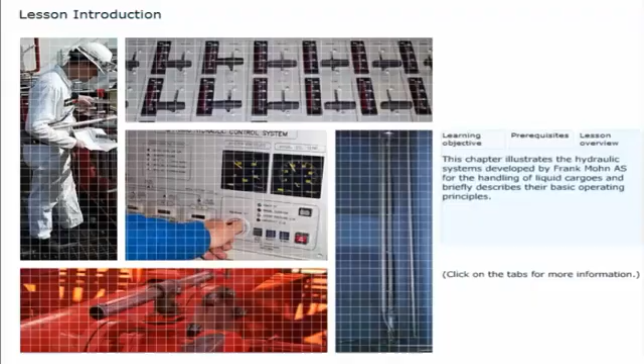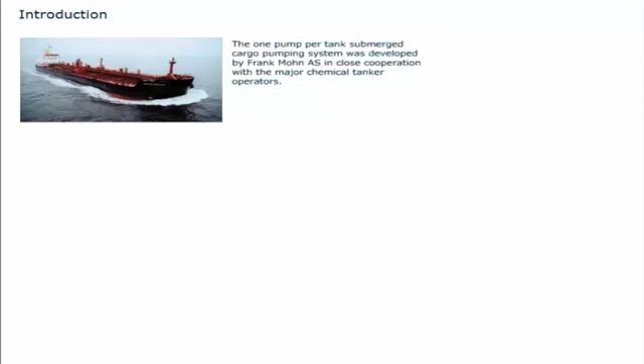The one pump per tank submerged cargo pumping system was developed by Frank Mohn AS in close cooperation with the major chemical tanker operators. The Framo system satisfies requirements for safe and profitable cargo handling, efficient stripping and tank cleaning.

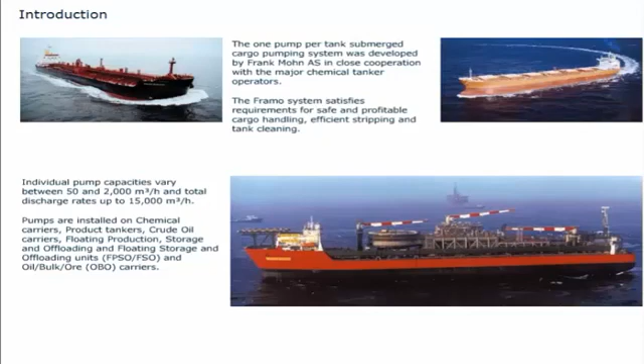Individual pump capacities vary between 50 and 2,000 cubic meters per hour, and total discharge rates up to 15,000 cubic meters per hour. Pumps are installed on chemical carriers, product tankers, crude oil carriers, floating production, storage and offloading, and floating storage and offloading units, FPSOs and FSOs.

And oil/bulk/ore OBO carriers. By January 2007, 48,655 cargo pumps had been delivered to or ordered for a total of 3,033 vessels.

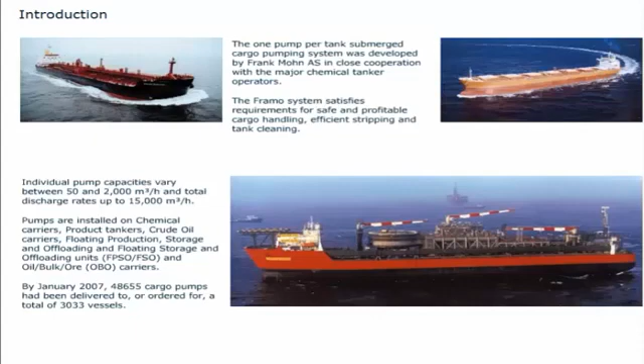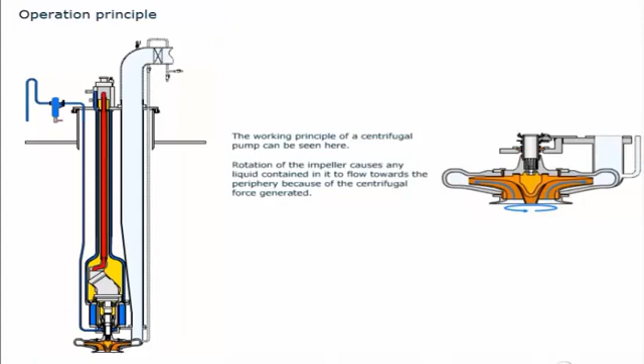The working principle of a centrifugal pump can be seen here. Rotation of the impeller causes any liquid contained in it to flow towards the periphery because of the centrifugal force generated. The center or eye of the impeller is thus evacuated, and liquid from the suction line then flows in to fill the void.

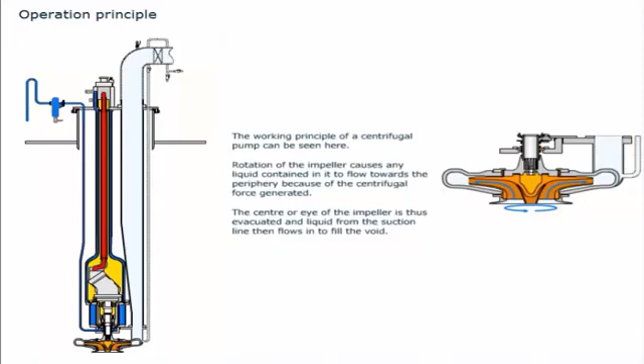The cargo pump is supported by a deck trunk welded to the deck. All the connections are on the top cover plate, to which a capacity control valve is also mounted for remote and local operation of the cargo pump.

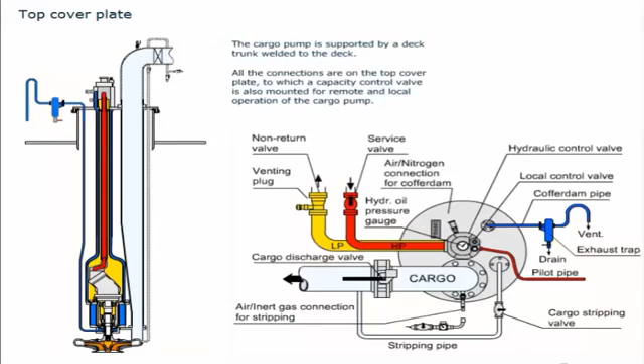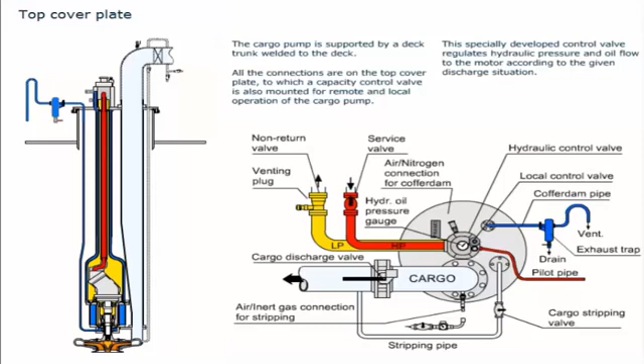This specially developed control valve regulates hydraulic pressure and oil flow to the motor according to the given discharge situation. The pressure gauge indicates the oil pressure to the motor. The pipe stack connects the pump unit to the top cover plate.

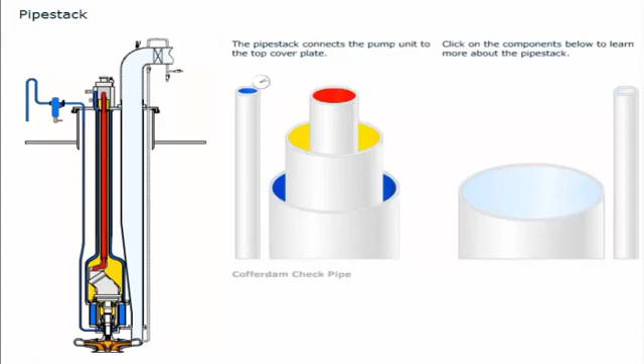Click on the components below to learn more about the pipe stack. The return from the cofferdam pipe. If any leakages, this will be discovered in the exhaust trap on the top cover plate during purging.

This is the supply line for the cargo pump. It carries the oil from the power packs to drive the hydraulic motor. This is the return line for the cargo pump. It carries the oil back after it has been used to run the motor.

Nitrogen or air is introduced during purging in order to ensure that the cofferdam is open and does not contain any cargo or oil.

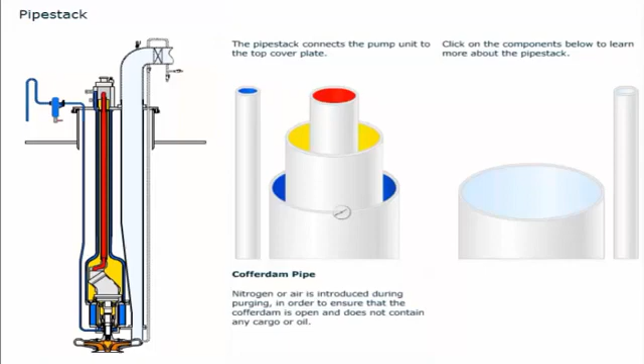Cargo is forced through this line when the motor and impeller are running. When emptying a tank, nitrogen or air is introduced through the cargo discharge pipe, and any final remaining product is forced up this line and on through the cargo manifold.

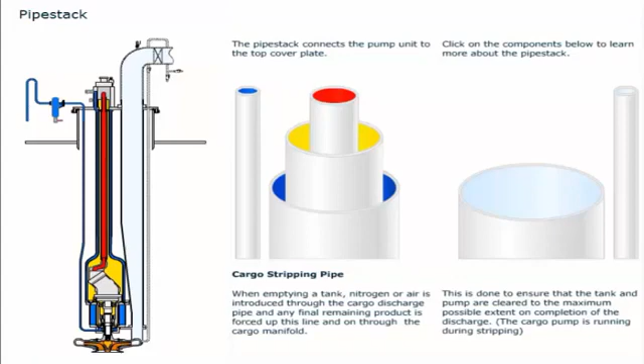This is done to ensure that the tank and pump are cleared to the maximum possible extent on completion of the discharge. The cargo pump is running during stripping.

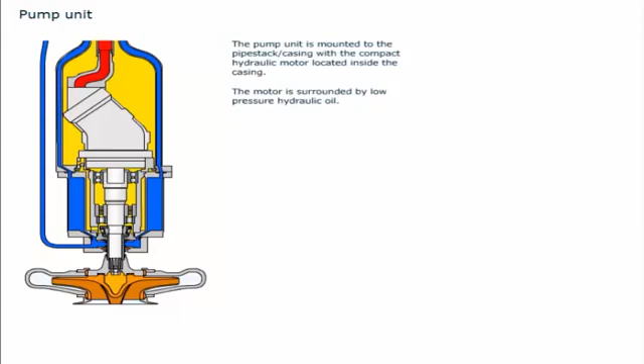The pump unit is mounted to the pipe stack/casing with a compact hydraulic motor located inside the casing. The motor is surrounded by low-pressure hydraulic oil. A short independent shaft, supported by bearings lubricated by hydraulic oil, is connected to a single-stage end-suction centrifugal pump.

The hydraulic section is surrounded by a cofferdam that completely segregates the hydraulic oil from the cargo, with a manual seal condition monitoring system. This seal arrangement consists of a mechanical oil seal, single cofferdam lip seal, and a double cargo lip seal. The cargo seal is exposed only to static head from the cargo.

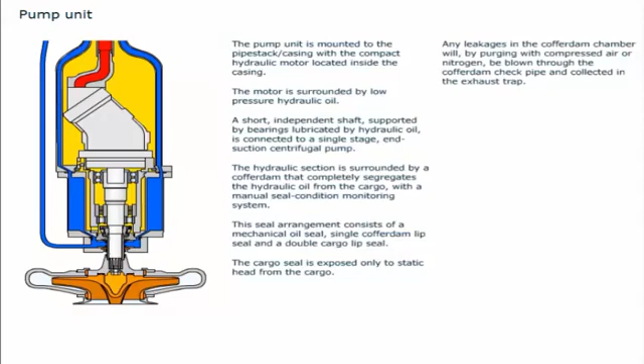Any leakages in the cofferdam chamber will, by purging with compressed air or nitrogen, be blown through the cofferdam check pipe and collected in the exhaust trap.

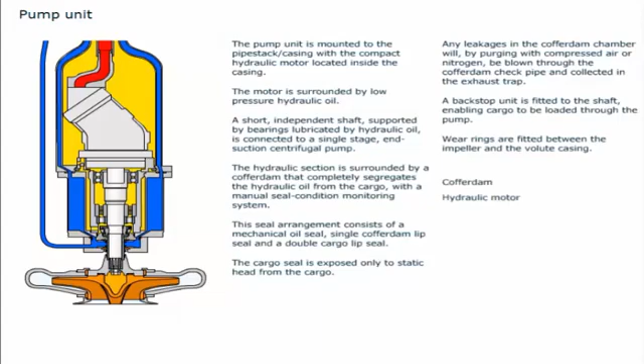A backstop unit is fitted to the shaft, enabling cargo to be loaded through the pump. Wear rings are fitted between the impeller and the volute casing. Click on the buttons to learn more about the pump unit.

The hydraulic system is built as a central hydraulic main ring line system in either a closed or open loop. Hydraulic pumps deliver oil to the main pressure line. From this main pressure line, a number of hydraulic motors can be run, provided that a sufficient number of power packs have been started.

In order not to overspeed the hydraulic motors, a speed control valve is installed upstream of each motor. It is important to understand that the power packs deliver the oil and the cargo pumps are consumers.

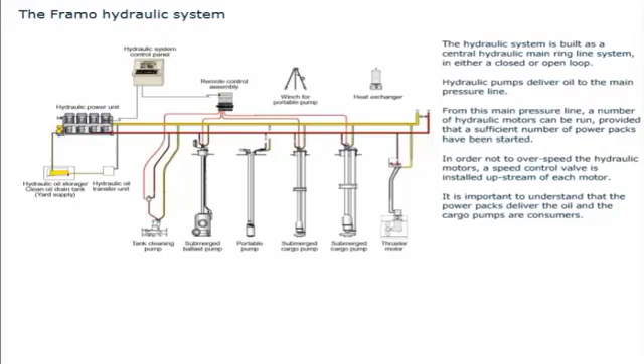In an open-loop system, the hydraulic oil is gravitated from a hydraulic oil tank to the power packs and further on via high-pressure lines to the cargo pumps and other consumers in the system. After use, the oil is transported via the return lines back into the hydraulic tank.

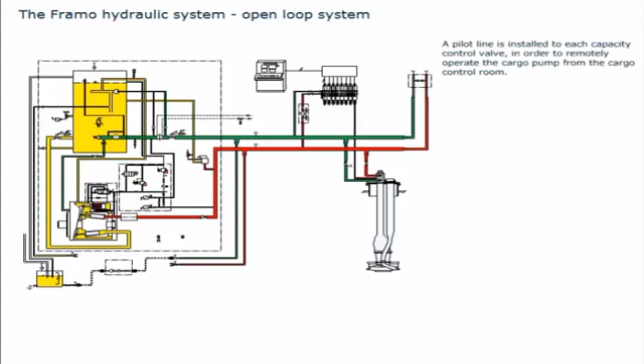A pilot line is installed to each capacity control valve in order to remotely operate the cargo pump from the cargo control room. An oil cooler is installed in the system in order to keep the oil temperature within desired limits. A jockey pump is installed inside the hydraulic oil tank in order to maintain positive pressure in the hydraulic system and to avoid contamination of the oil with cargo if a leakage should occur in the cargo pump.

The jockey pump also serves as a cooling/lubrication pump for the main hydraulic pumps. This system requires a rather large hydraulic oil tank, since all oil used is returned to this tank before being pumped back again to the consumers.

Due to this, the open-loop arrangement is commonly used in small systems, while the closed-loop arrangement is preferred for large systems.

Advantages include simple air release procedure, less piping, leading to cost reduction and lower risk of leakage, and a reduced number of components.

The disadvantage of this system is the size of the hydraulic tank.

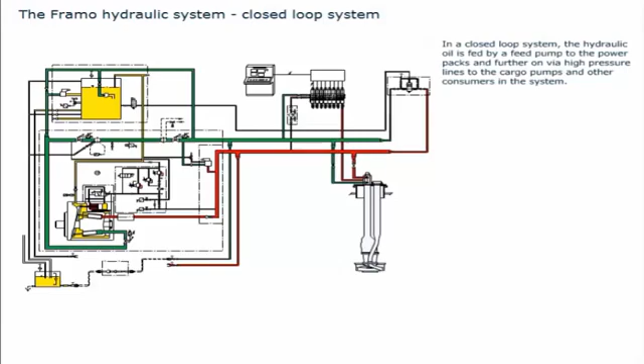In a closed-loop system, the hydraulic oil is fed by a feed pump to the power packs and further on via high-pressure lines to the cargo pumps and other consumers in the system. After use, the oil is transported via the return line.

In a closed system, only 10% of the oil goes back to the hydraulic tank, while the rest is used directly on the power packs and back to the consumers.

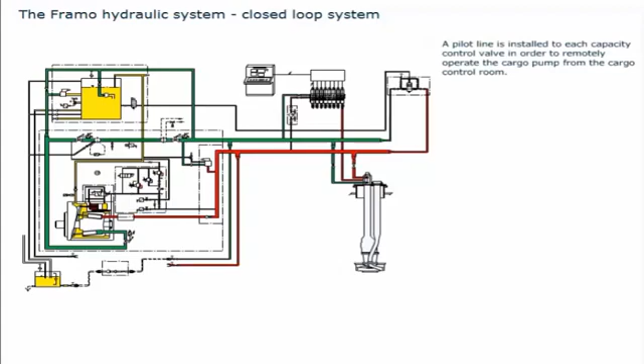A pilot line is installed to each capacity control valve in order to remotely operate the cargo pump from the cargo control room. An oil cooler is installed in the system in order to keep the oil temperature within desired limits. 3 feed pumps are installed on the hydraulic tank, 1 running constantly, 1 in standby mode, and 1 in reserve.

When the cargo system is not in use, the selected feed pump is delivering low pressure, sufficient to maintain positive pressure in the hydraulic system and to avoid contamination of the oil with cargo if a leakage should occur in the cargo pump. When the system is in use, the second feed pump starts automatically, increasing the pressure such that, in addition to leak prevention, 10% of the total oil capacity is returned to the hydraulic tank.

In addition to leak prevention, 10% of the total oil capacity is returned to the hydraulic tank. The third pump is brought online in the event of a problem with one of the regular pumps.

Since only 10% of the oil used is returned to the hydraulic tank, this system requires a much smaller hydraulic oil tank than the open system. The closed-loop system is commonly used in big systems.

The advantage of this system is the size of the hydraulic tank. Disadvantages include a more complex air release procedure, more piping, and more components.

Note: in the older systems, 2 feed pumps were installed. 1 was running in standby and 2 during normal operation.

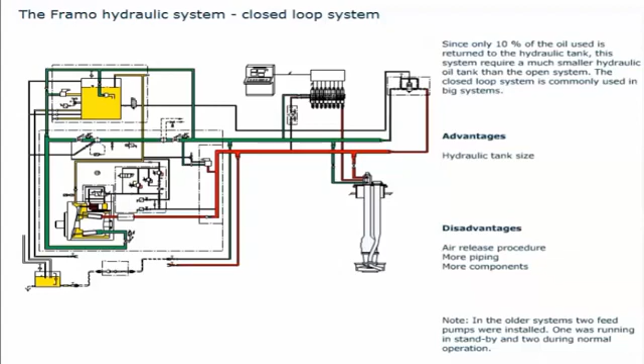Hydraulic pumps, motors and controls are devices requiring close tolerances, controlled wear surfaces, accurate finish and an adequate supply of clean hydraulic fluid. Contaminated oil will not provide proper lubrication and is a leading contributor to reduced efficiency, excessive downtime and increased maintenance cost.

The maximum recommended water content is 300 parts per million, or 0.03%, and must under no circumstances be above 500 parts per million, or 0.05%.

If in doubt, please contact Framo.

Recommended cleanliness level is code 16/12, according to ISO 4406, or CETOP PR20. 16/12 means that the number of particles above 5 micron in 1 milliliter is between 320 and 640, and the number of particles above 15 micron in 1 milliliter is between 20 and 40.

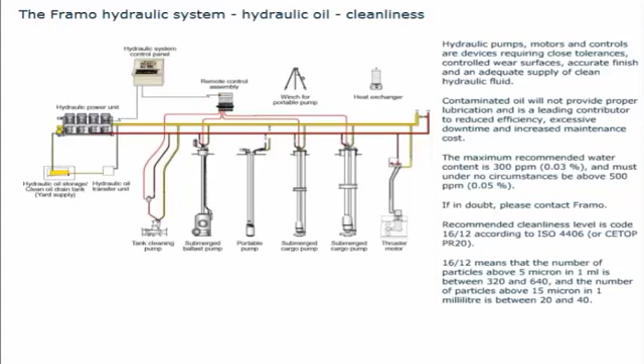The recommended operating temperature of the hydraulic oil is between 30 and 55 degrees Celsius.

If the oil temperature is below 20 degrees Celsius, circulate the oil through the heating and venting valve installed in the system for heating with only 1 power pack running until the desired oil temperature is reached. Note: do not exceed 100 bar circulating pressure during heating.

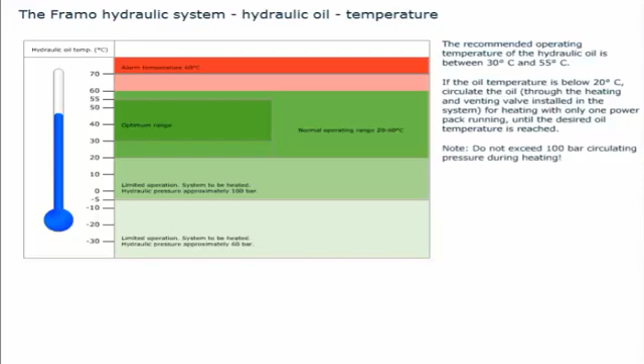Even though most operations which happen when you push the start button on a power pack are automatic, it is important to know what actually happens and which items need to be checked prior to startup.

In order to perform an economical discharge and minimize wear and tear on the equipment, it is very important that the number of power packs used corresponds to the number of hydraulic motors used.

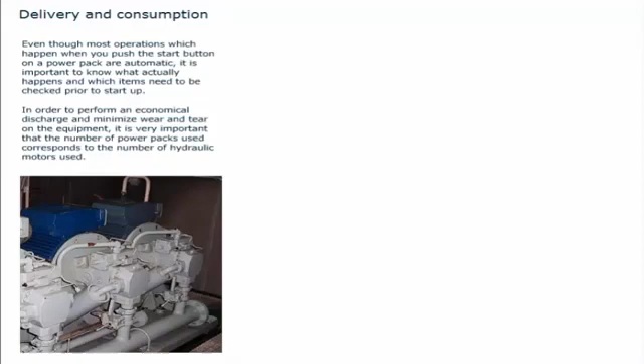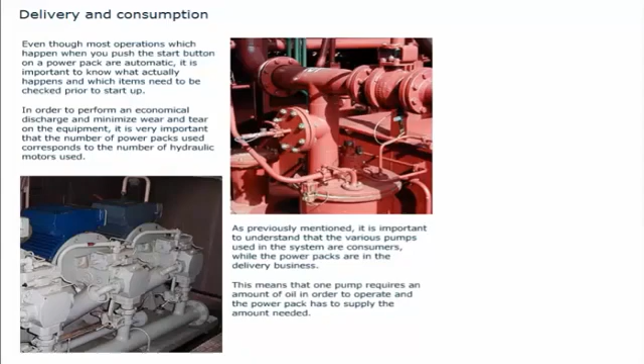As previously mentioned, it is important to understand that the various pumps used in the system are consumers, while the power packs are in the delivery business. This means that one pump requires an amount of oil in order to operate, and the power pack has to supply the amount needed. In your manual on board, you will find a table where you can find out how much oil flow each hydraulic motor needs and how much oil flow each power pack delivers. See under Technical Data in your manual.

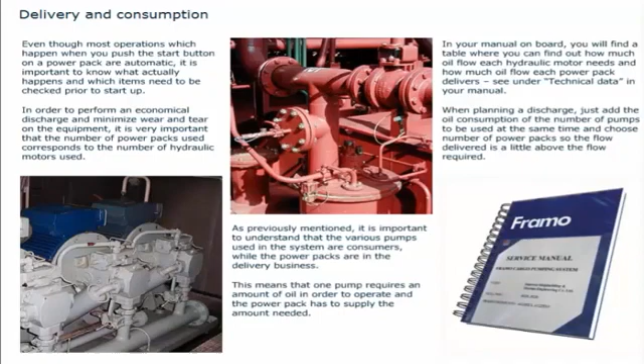When planning a discharge, just add the oil consumption of the number of pumps to be used at the same time and choose number of power packs so the flow delivered is a little above the flow required.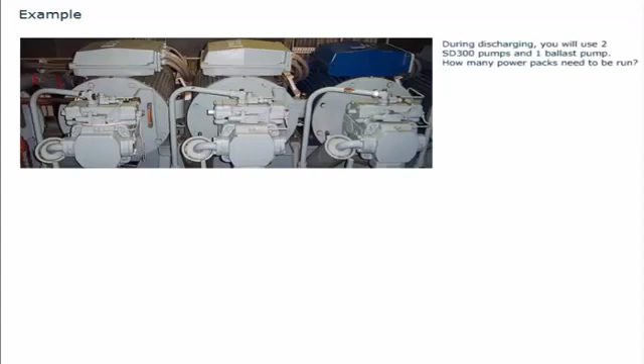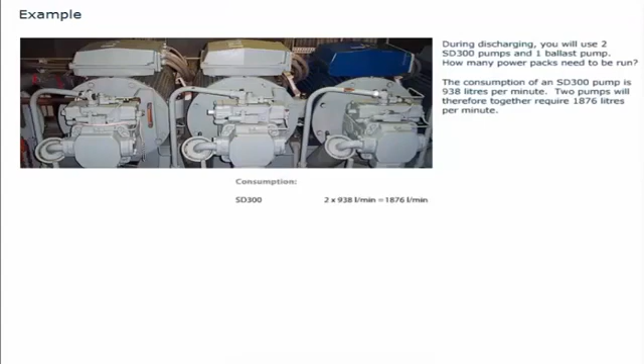For example, during discharging you will use 2 SD300 pumps and 1 ballast pump. How many power packs need to be run? The consumption of an SD300 pump is 938 litres per minute. 2 pumps will therefore together require 1,876 litres per minute. The ballast pump consumes 246 litres per minute. This gives a total oil consumption of 2,122 litres per minute.

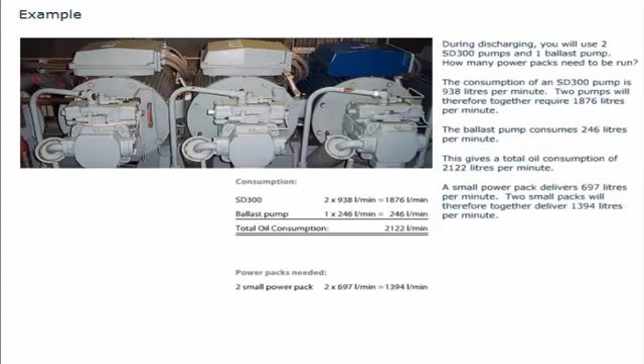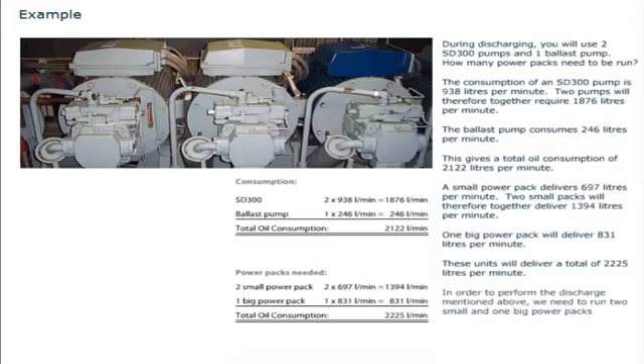A small power pack delivers 697 litres per minute. 2 small packs will therefore together deliver 1,394 litres per minute. 1 big power pack will deliver 831 litres per minute. These units will deliver a total of 2,225 litres per minute. We therefore need to run 2 small and 1 big power pack to meet the demand.

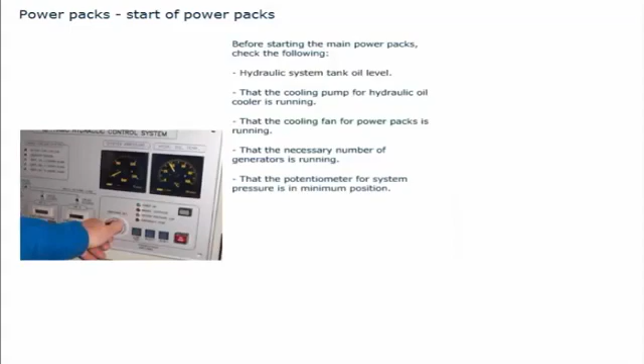Before starting the main power packs, check the following: hydraulic system tank oil level, that the cooling pump for hydraulic oil cooler is running, that the cooling fan for power packs is running, that the necessary number of generators is running, that the potentiometer for system pressure is in minimum position, that the speed control valves for all consumers are in minimum position, and that the cargo pump cofferdams are purged. Start the main power packs.

After an operation is completed, all consumers have been stopped and the main power packs are no longer required, the system should be stopped as follows.

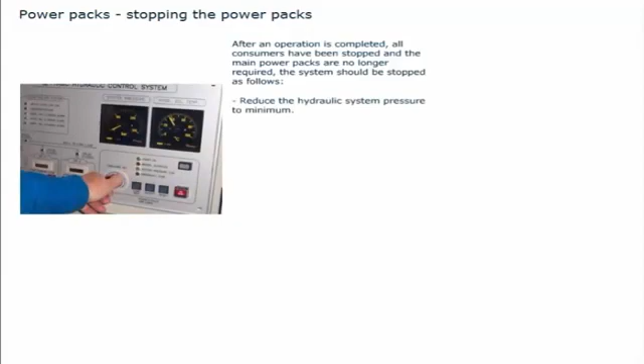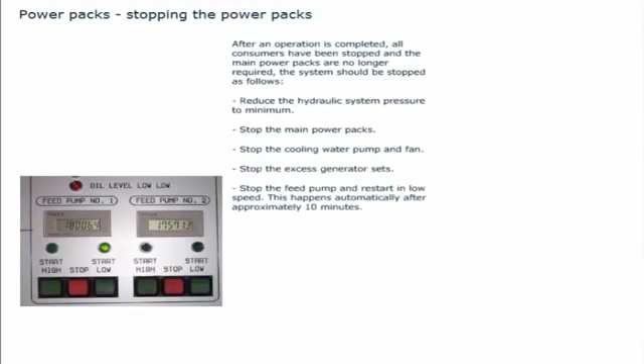Reduce the hydraulic system pressure to minimum. Stop the main power packs. Stop the cooling water pump and fan. Stop the excess generator sets. Stop the feed pump and restart in low speed. This happens automatically after approximately 10 minutes.

Always leave one of the feed or jockey pumps running in low speed to maintain overpressure in the hydraulic system.

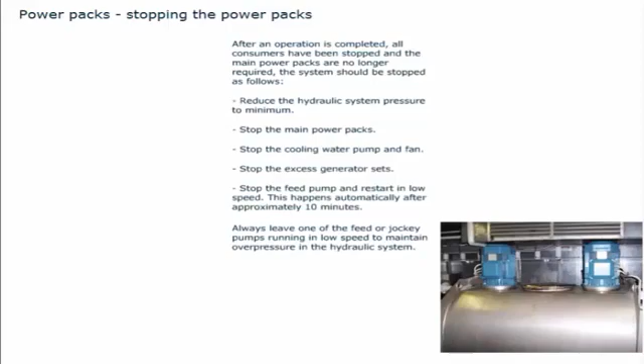If by accident cargo should leak into the hydraulic oil system when the power packs are stopped, the mixture of oil and cargo would ruin the plant. To prevent this, the hydraulic oil pressure must always be higher than the cargo static pressure.

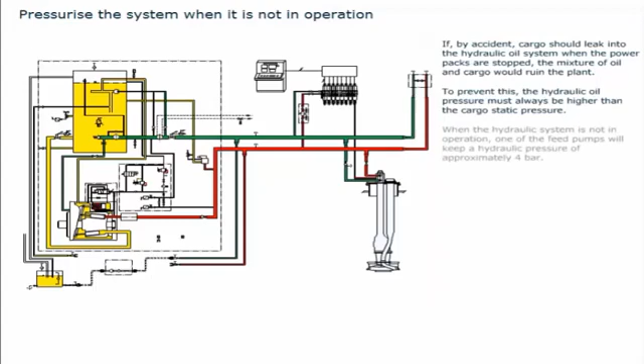When the hydraulic system is not in operation, one of the feed pumps will keep a hydraulic pressure of approximately 4 bar. One of the feed or jockey pumps must always be running in low speed, and all valves in the main return line and in front of all cargo pumps and other consumers must be open.

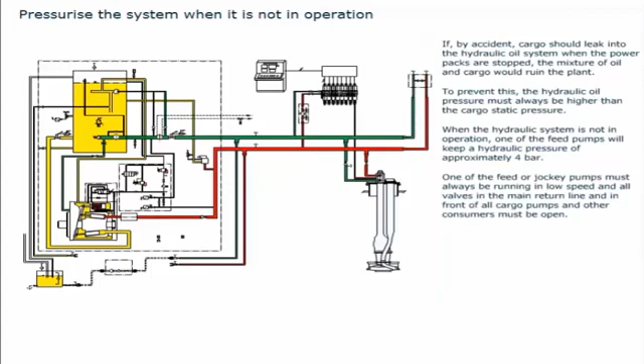It is important that emergency stop buttons are used in emergency situations only, and not for routine operational stopping of the system. An emergency stop stresses the system and should be avoided, except in critical circumstances.

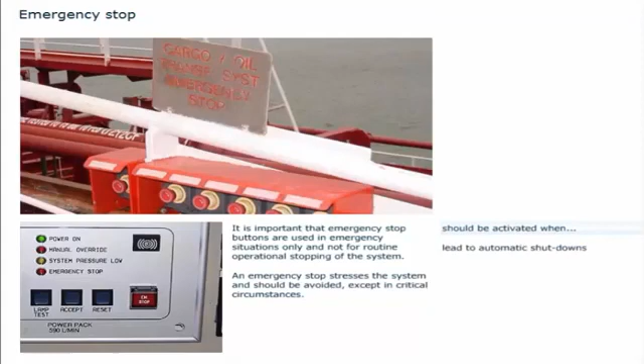Emergency stop buttons should be activated when the following conditions occur: damage to the hydraulic pressure pipes or hoses that leads to leakage, critical pressure pulsation in the system known as hunting, critical vibration on the power packs, damage to the cargo lines, and uncontrolled spill or leakage during discharging.

The following conditions should lead to automatic shutdown of the system: low oil level in tank, closed valve in return line, closed system low feed pressure, and closed systems feed pump failure when running at high speed. After a shutdown, the error must be located and repaired before restart.

Before restart, reset system. Refill oil if necessary in accordance with normal procedures. Vent the system thoroughly and start up in accordance with normal procedures.